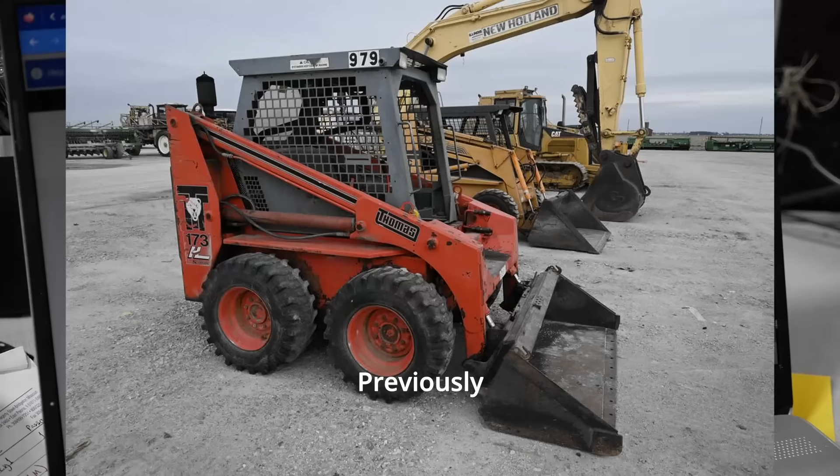It appears to be a Canadian-built copy of an older Bobcat. It won't start. There's your negative battery cable. There's your negative battery terminal. Water pump bypass hose. Nope.

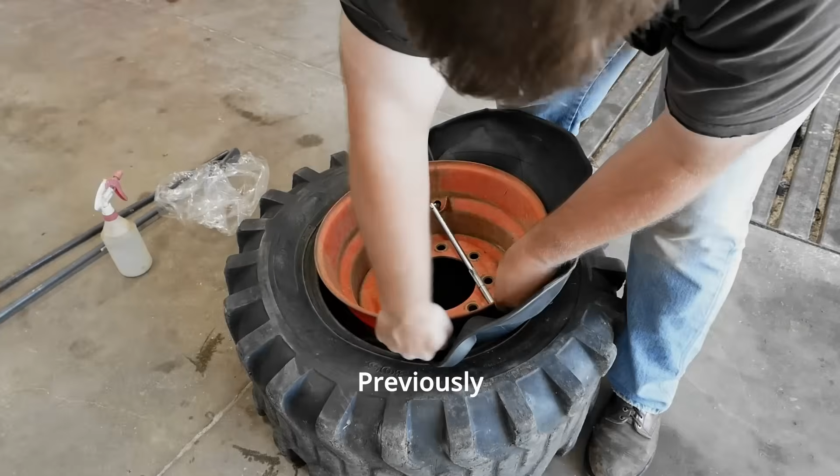Hey little buddy. You got in there, pup.

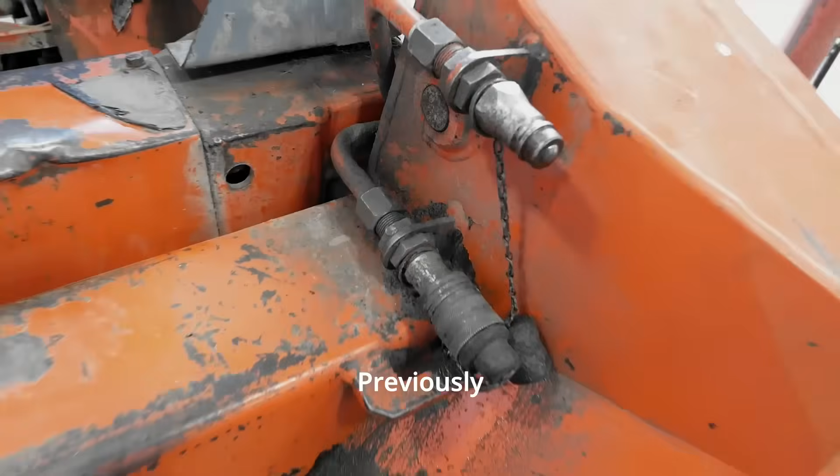You can get out. That's some impressive wear for something with basically no load on it. The auxiliary couplings here leak pretty badly. The left side boom cylinder, it leaks pretty badly. Needs to be rebuilt. But the big problem is the engine. It runs fine, but it just doesn't seem like it revs up high enough.

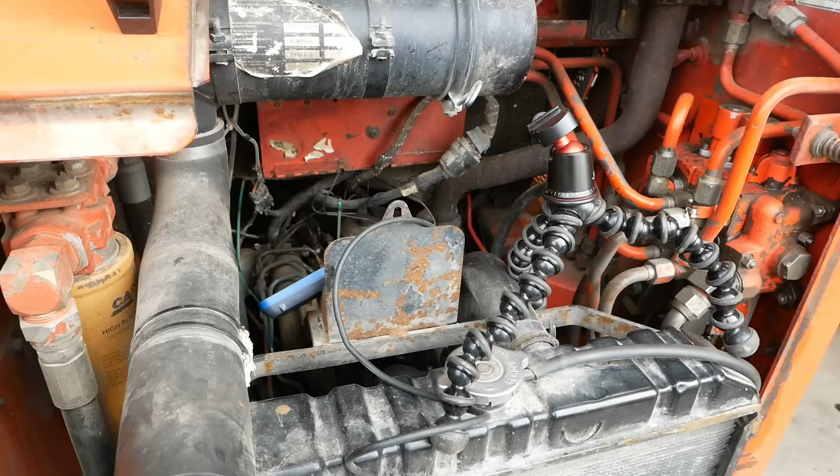Always camera shy. First things first, I'm trying to figure out why the engine won't rev up all the way. I pulled this cover off the side of the injection pump. This is the shutdown lever. I don't know if you guys will be able to see where it lives, right there in front of the dipstick. There are 3 springs. There's a start spring, a torque spring, and 2 governor springs.

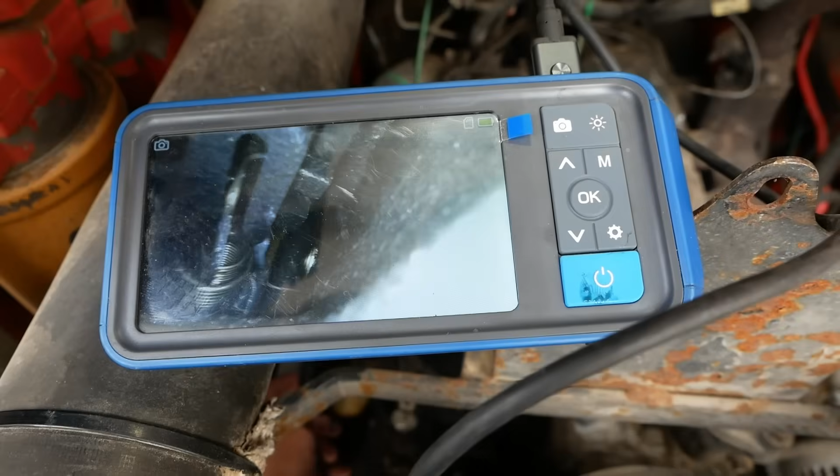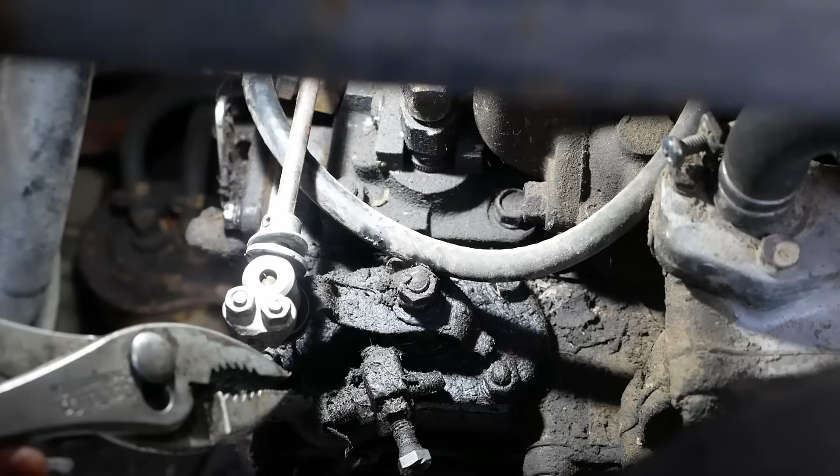You can see the governor springs right there, one inside the other. They both appear to be intact. So I don't think that's the problem. I'm pretty sure the governor springs are okay, but I did stumble onto something interesting. So this is the throttle shaft, or some people call it the governor shaft. And yeah, I can turn that inside the lever, like quite a bit. I can turn it probably 30 degrees. That doesn't seem right. So I don't know if there's a key sheared or something.

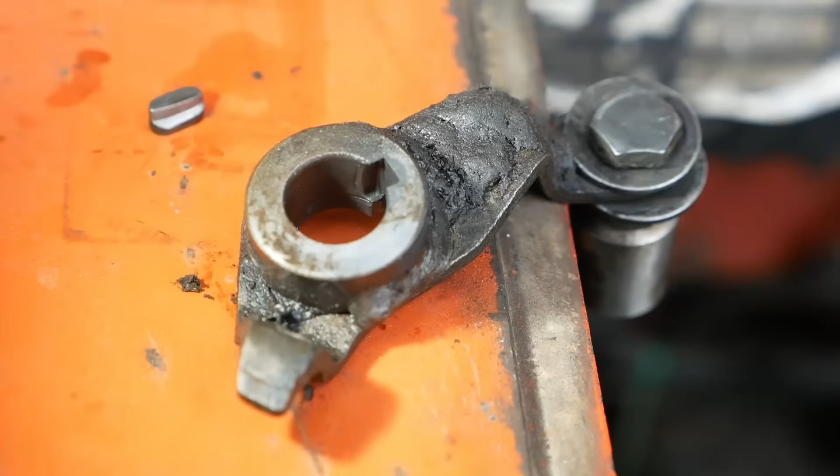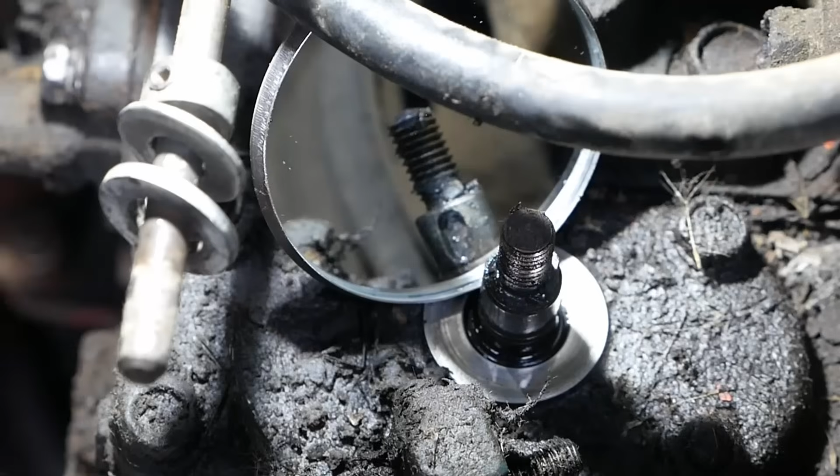I'm gonna pull that apart and we'll see. Well, there's your problem. At least that's a problem. Pretty extreme wear on that keyway. The key itself is also worn down to about half its normal thickness. Luckily, the keyway in the shaft looks okay.

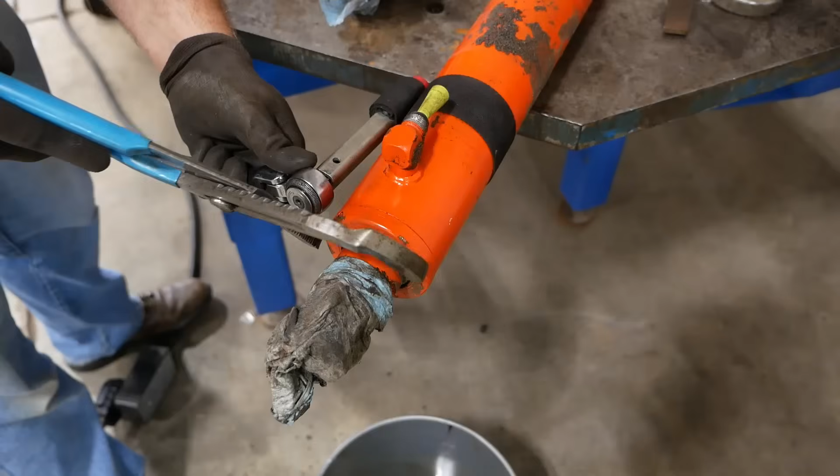I don't see any bite marks. I think this might be her first time. Oh, I don't know if this is gonna work or not.

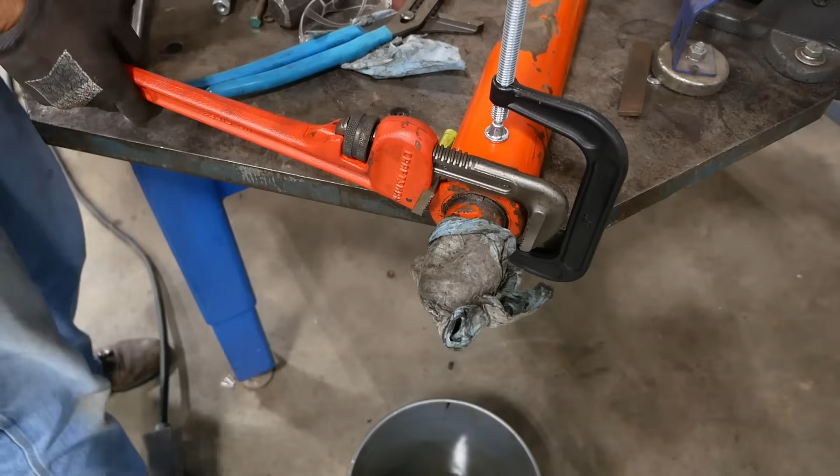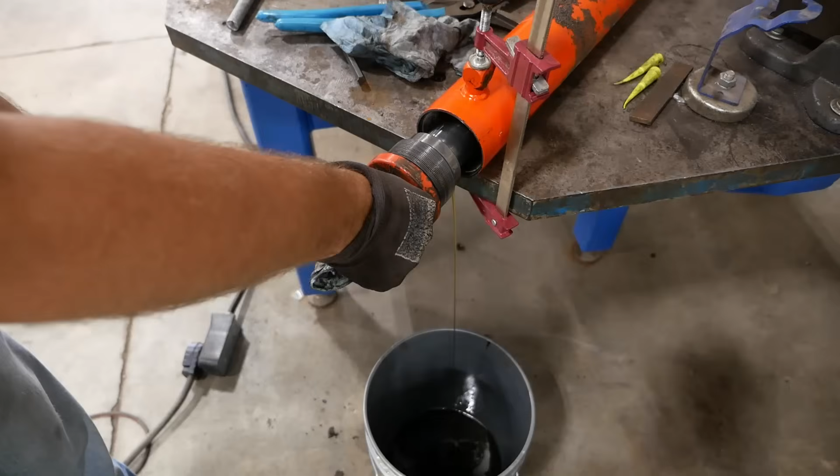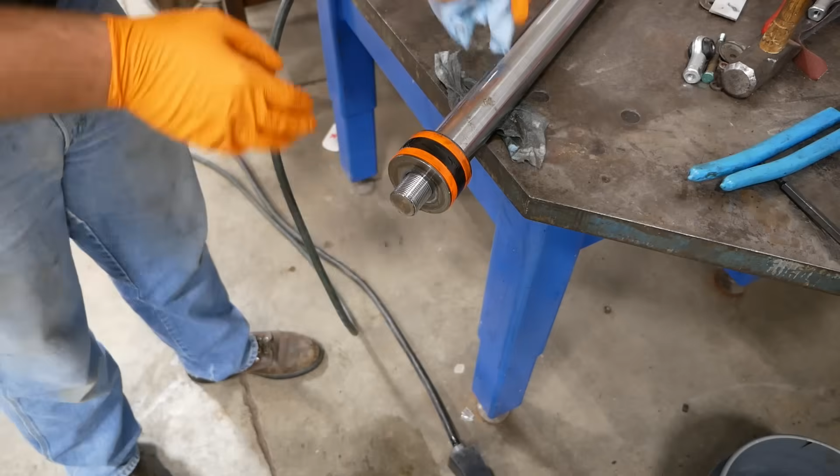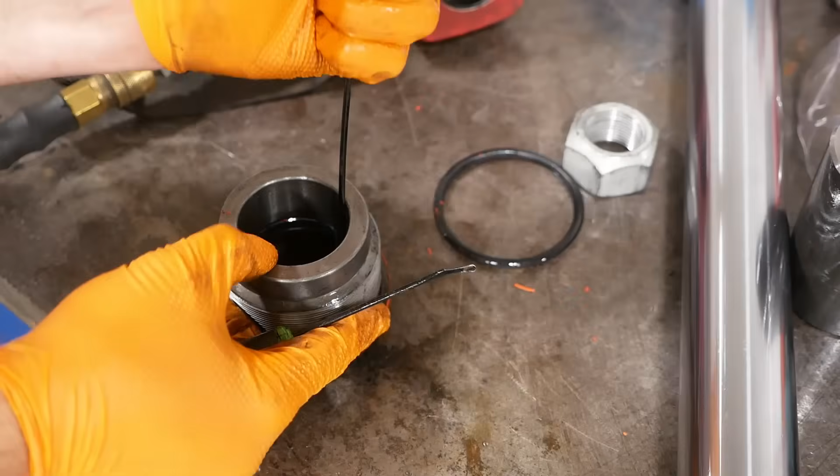Now we're gonna need the pipe wrench. So it has this hole here for a pin spanner, but that's more for assembly in the factory. Usually doesn't cut it when you want to take them apart. Oh gosh. Like I said, it's easy, big baby. Nothing to it. Oh, well, there you go. That makes it easy.

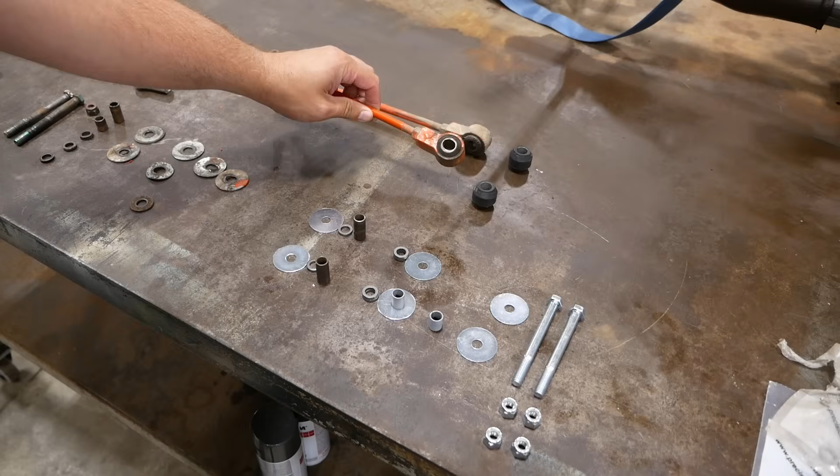I think we have the parts to fix these control linkages. Some of these were not easy to find. This should be the correct stack of washers and spacers. The only part we're going to reuse is these bushings that fit inside the joints. Everything was pretty sloppy. Even the washers were worn out. We had a weird bronze bushing stuffed in there for some reason. That one's not too good, so we're going to start over from scratch.

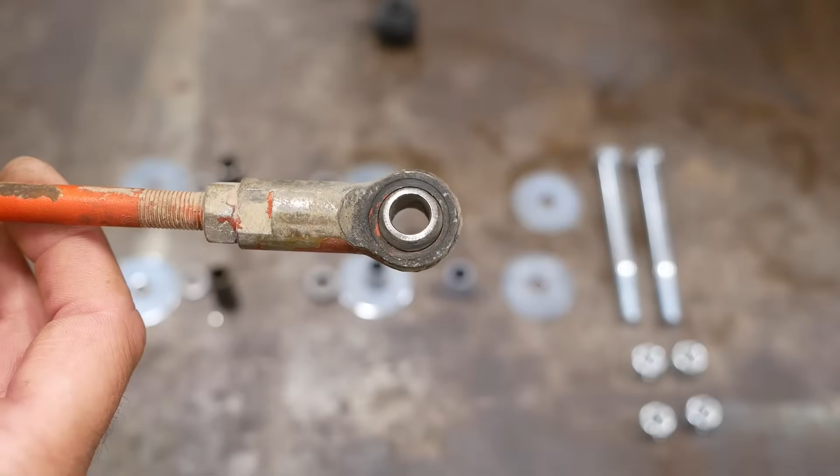The big thing is the rod ends. This end's not too bad. They have a plastic insert. They probably would have been fine, but they're cheap enough. I'm going to go ahead and replace them with a greasable version in case someone ever wants to grease them. The other end is not so good.

That's pretty wonky. This is a custom part, and they've pressed in a rubber bushing, which is made by Lord. I was finally able to track down someone who would sell them to me. This is a pretty standard setup for like aircraft controls. So if you're in a pinch trying to find these parts, an aircraft parts supplier might be able to help you.

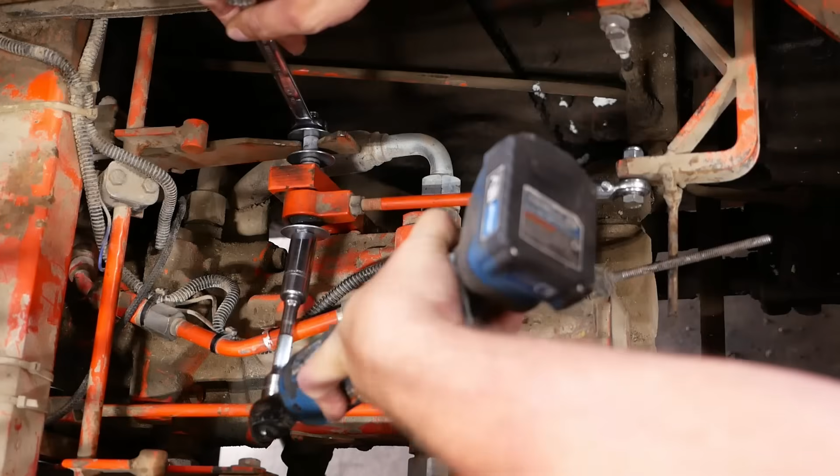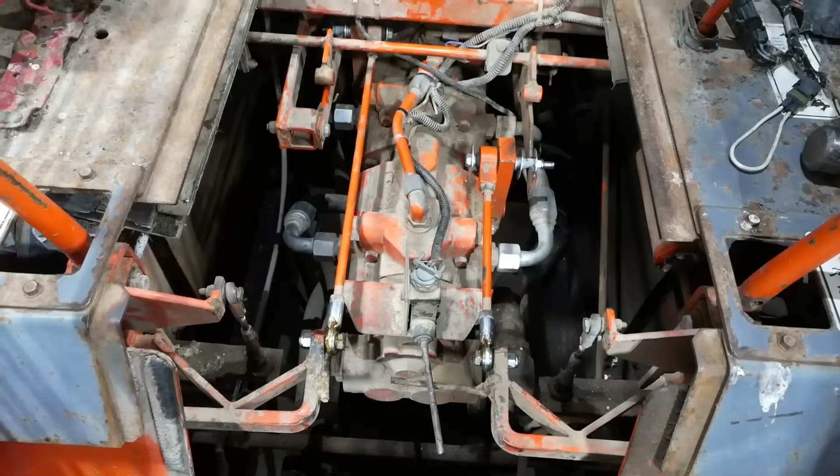That'll work. I'm sure we'll have to make some adjustments, but it's much better than it was. I know it probably seems trivial, but sloppy controls, they're no fun. Also, turns out we have the original battery hold down bracket. It was in the compartment over here. In fact, I picked it up in the video. I just didn't know what it was. So I went ahead and installed it. Yeah, no more block of wood required.

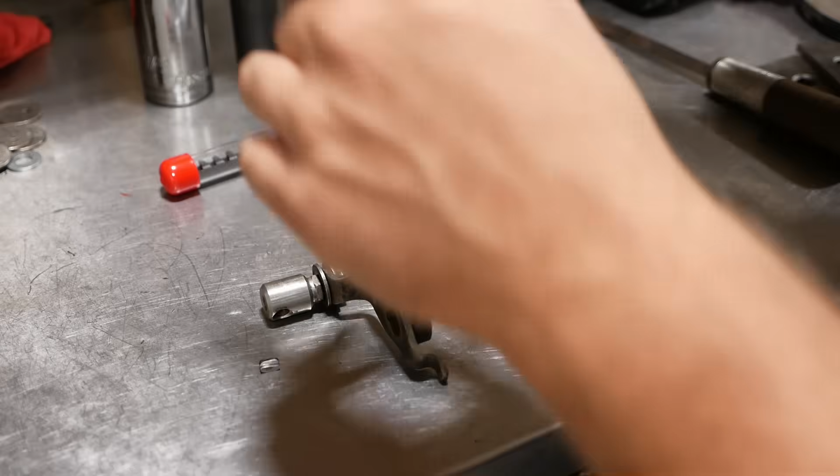I struck out trying to buy this part. Apparently my local dealership is a Kubota equipment dealer, not a Kubota engine dealer. So they can't even look up this part unless it's in a piece of Kubota equipment. Said if I had the part number, they could probably order it, but I don't, so they can't. Apparently the nearest Kubota engine dealership is somewhere over in eastern Wisconsin, so that's not very handy. Doesn't matter. I think we can fix it pretty easily.

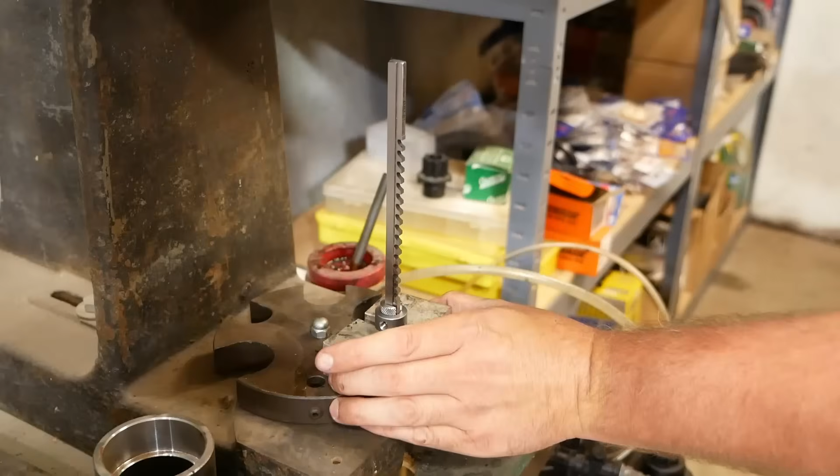So I ordered a shaft collar that has the same outside and inside diameter as this piece here. All we got to do is cut through this weld, remove this bushing, broach a new keyway in this bushing, and weld it back together. I also got a new key. Okay, this should broach a 4mm keyway into this 12mm bore.

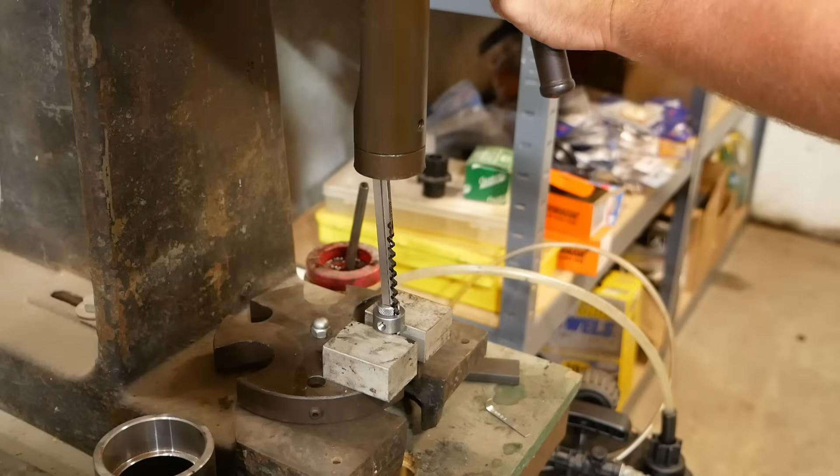Big thing you gotta watch when you're broaching is the broach wants to lean one way or the other, usually forward, which makes it broach too deep if you're not careful. Like I said, wants to lean forward. I mean backward. That's why I started with broaching. Figured I'd screw it up.

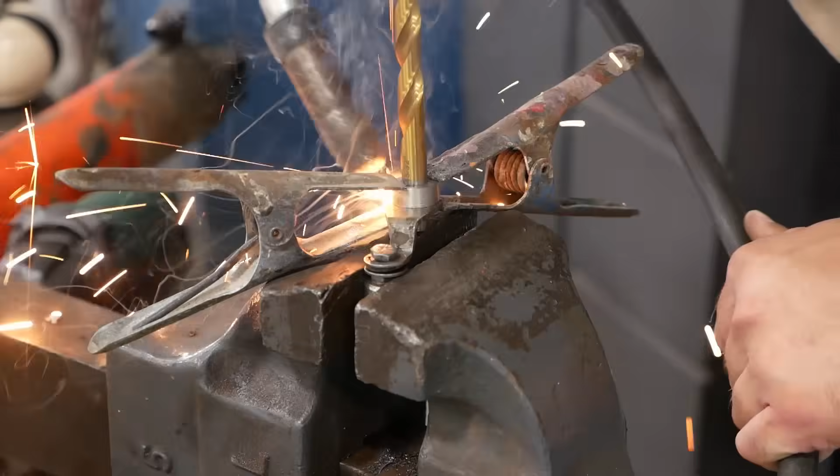That'll do. Little gray paint, nobody would ever know the difference. In case you weren't following what happened with this bushing, it broached too deep. I was in the middle of giving a lecture about how the broach likes to tip, and the broach tipped. The problem is the cutting pressure is all out here at the tips of the teeth, and it makes the broach want to lean back and cut too deep on the bottom.

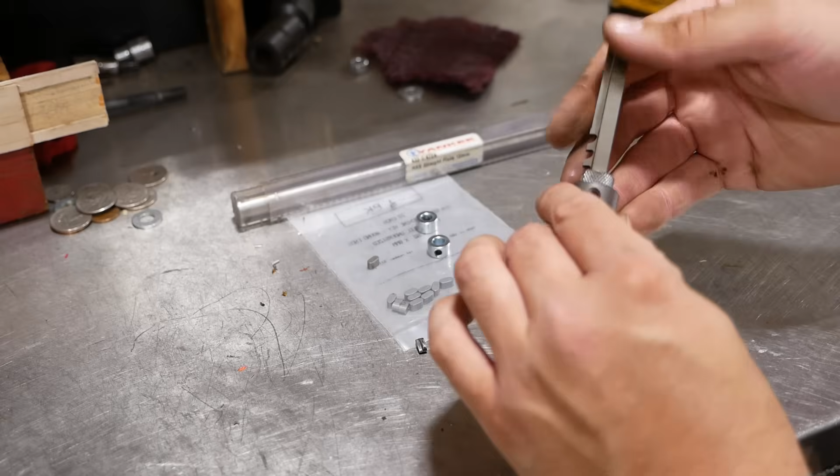See how you had that gap? So it should be like that, and it wants to rock back like that. So I should have turned it 90 degrees so it was better supported. Also, there's always play in the ram of the arbor press, so you gotta take small bites, pay attention, that kind of stuff. No big deal. That's why I have a lathe. This collar was too thick anyway, so I was gonna have to turn it down no matter what. For some reason I had a 12mm reamer, so not a big deal.

Oh, I probably should have put that through the linkage first. Yep, I should have. Okay. Oh, that's pretty sloppy in there too. Probably should have just replaced the whole throttle plate. I guess we'll see if this works first.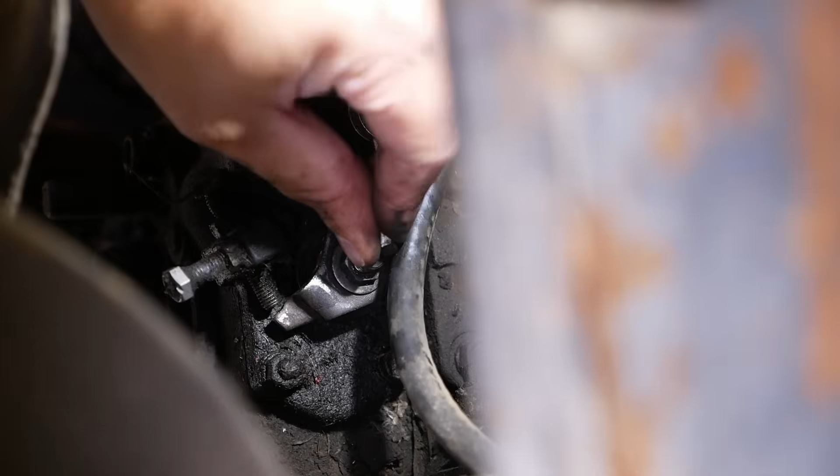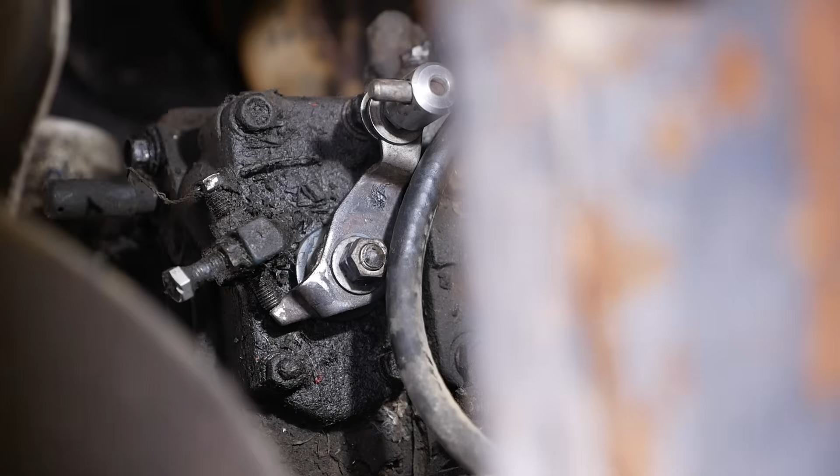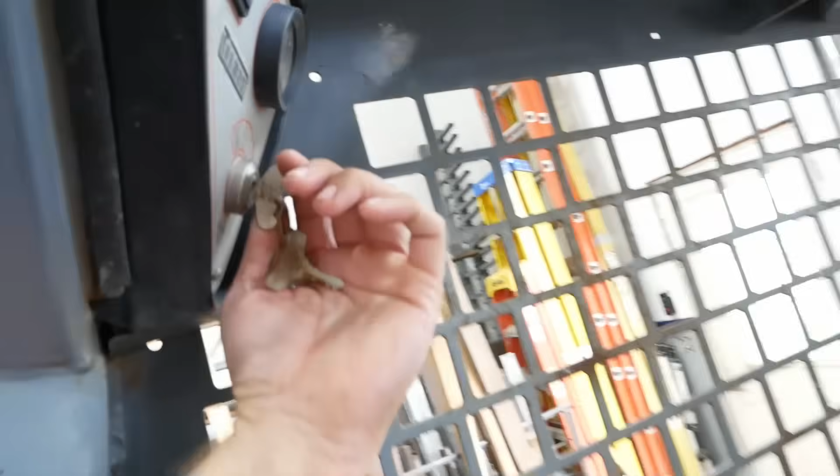Oh, this is pretty hokey. Be a lot better if it tightened down against the shoulder instead of having this weird double nut setup. Yeah, because if you tighten it too tight, it stops turning. I don't know, we'll give it a shot. Shouldn't be a problem to run it with the cylinder off, as long as we don't pull any levers. I'm gonna go ahead and put the bar down. Okay. Here we go.

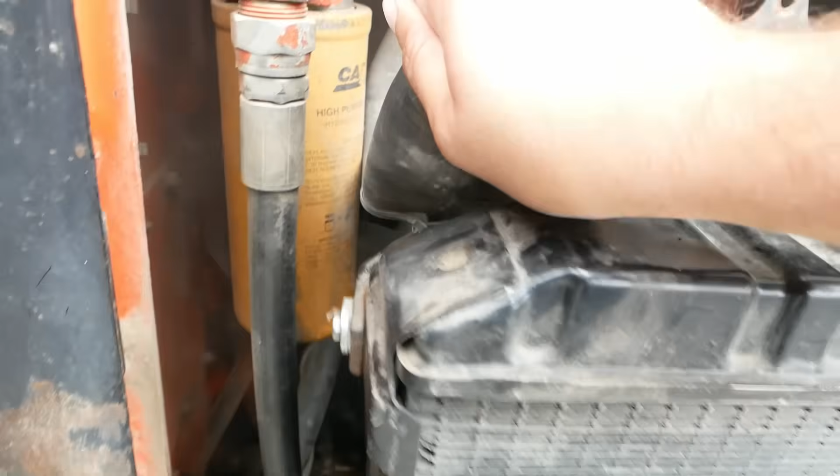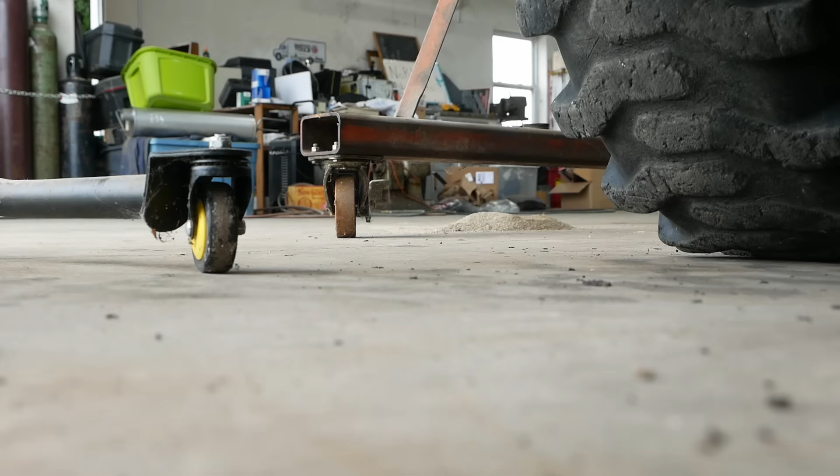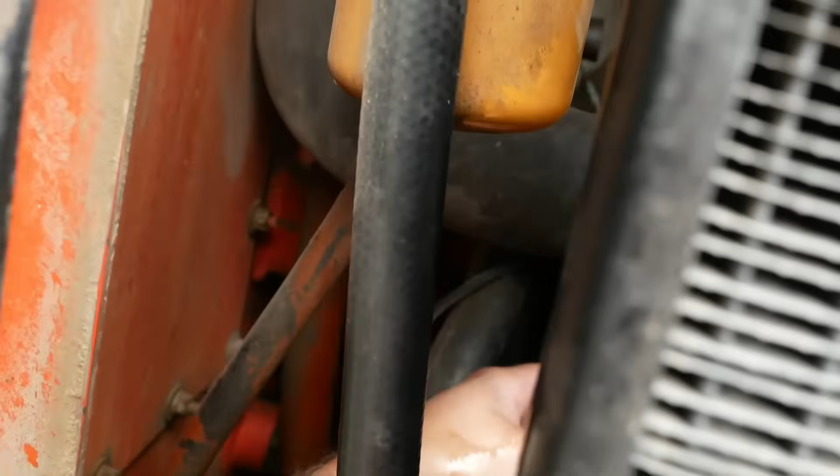That's not good. We're stuck at full fuel, and I can't shut it off. I don't even know how to. Come on, baby, die. Can I pinch the fuel line some way? Oh, thank God. That was not good. What the heck did I do wrong? Was not expecting that. Why doesn't the shutdown work? Okay, well, yeah, that's not good.

Well, that was fun. She was stuck at full throttle and then some for probably about 30 seconds. The shutdown was unresponsive, the throttle was unresponsive. I tried capping off the air intake, that slowed it down, but it didn't kill it. I finally was able to pinch the fuel line and shut her down completely. Yeah, I guess I got the little shutdown lever in the wrong spot when I put it back together. So I fixed that. We're gonna try it again. Hopefully we don't have a repeat, because I don't think she's got too many of those left in her.

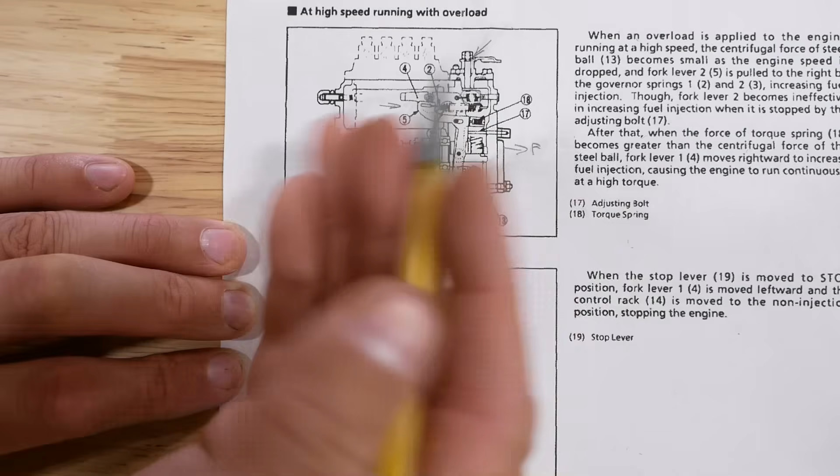Here's what happened. This is the injection pump. This is the front of the engine, which is actually at the back of the machine. This is the throttle shaft that had the worn keyway that we repaired. This is the end of the rack. It connects to the plungers and it controls how much fuel they deliver. When the engine is turned off, this cold start spring pulls the rack all the way to full fuel. It basically puts it at full throttle, makes it a little easier to start. Once it starts, the governor pushes this lever out, pulls the rack back to the normal position, and you go back to your normal RPM.

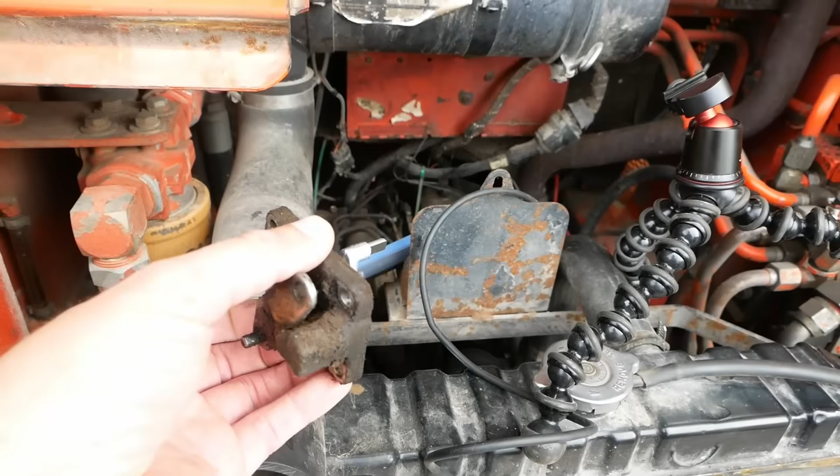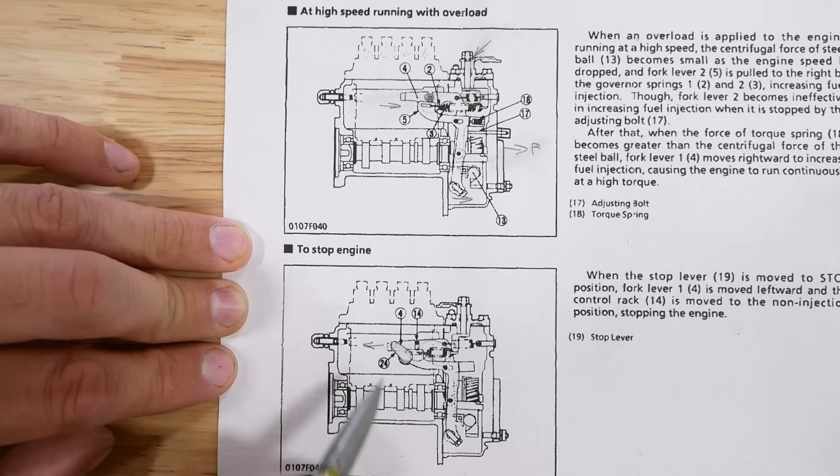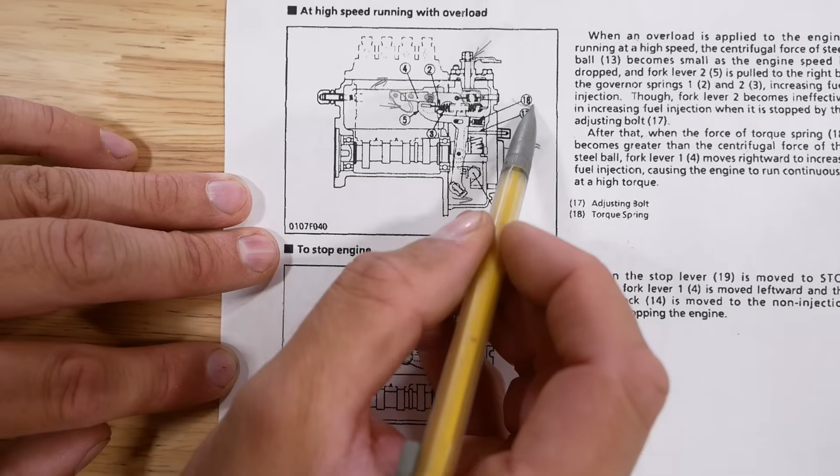When you shut the engine off, this lever here, which is inside the cover that I removed to inspect the governor springs, pushes the rack all the way towards the no fuel position, shuts the engine down. What happened is when I installed that cover back on the pump, I got the lever over here instead of over here. This lever is actually spring loaded this direction, so it was spring loading the rack into the full fuel position. So basically sticking it at full throttle and then some, because it was actually pushing against this torque spring. That's why it was smoking like a freight train.

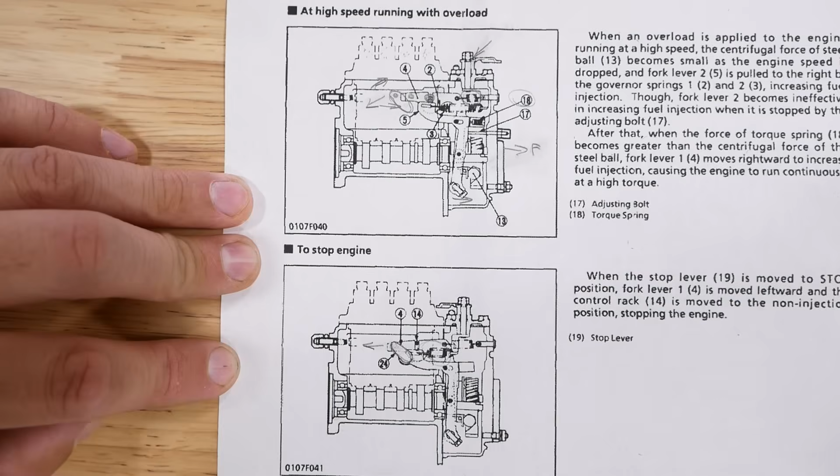And even worse, because the lever was on the wrong side, I couldn't shut it down. There was no way to pull the rack off of the full throttle position. So yeah, that's not a good situation. I don't know how I did that. I mean, I thought I was being careful to get that in the right spot, but apparently not. So yeah, if you're working on a Kubota, be careful of that.

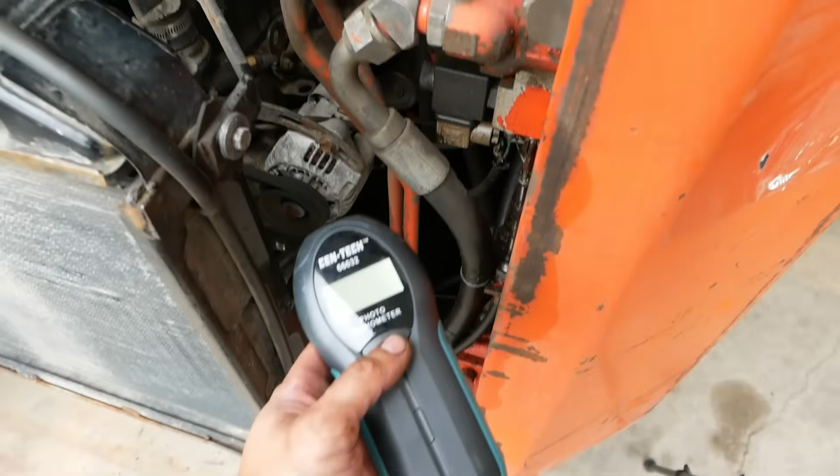That'll do. 2700 is good enough for me. Good thing these Kubota engines are tough. I don't think we hurt it. Probably wouldn't have wanted to run it at full rack for much longer. I was waiting for pieces to come flying out. I'm taking a break. That was a heart racing moment.

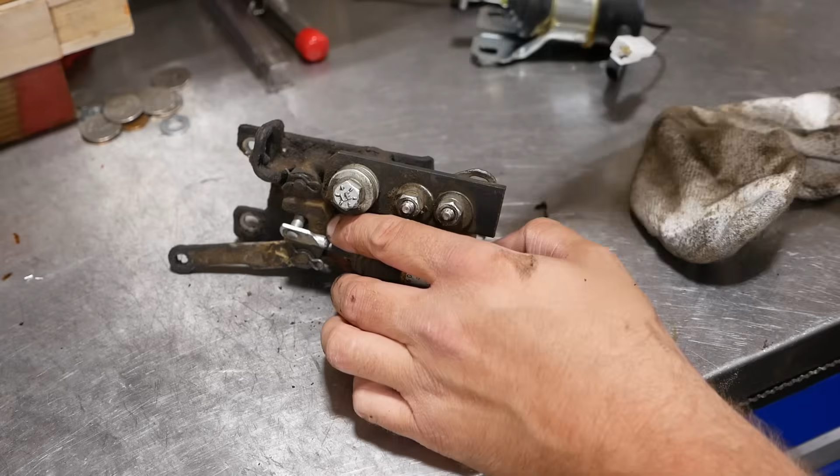They've got this shutdown solenoid all janked up. This is the wrong solenoid. They cobbled together a couple of brackets with a bunch of washers, jammed an inch-size bolt through it. It works, but doesn't really line up correctly. Anyway, they had the right one at the local dealership, so I went ahead and bought it. Kind of pricey, but should work better than this, whatever you want to call it.

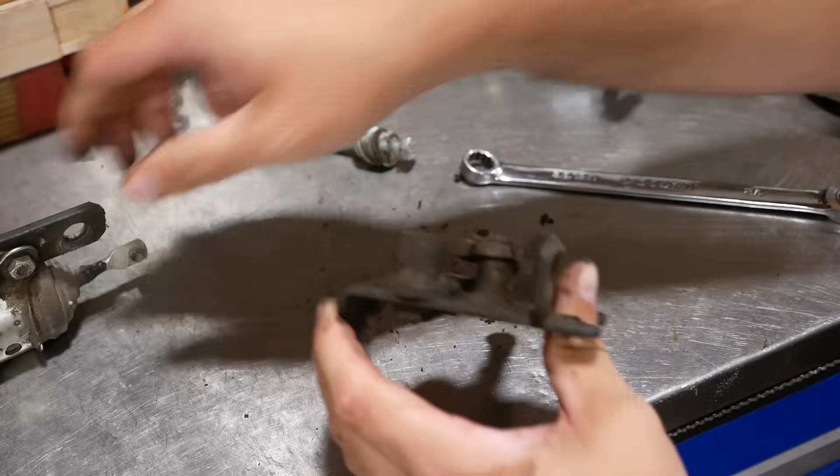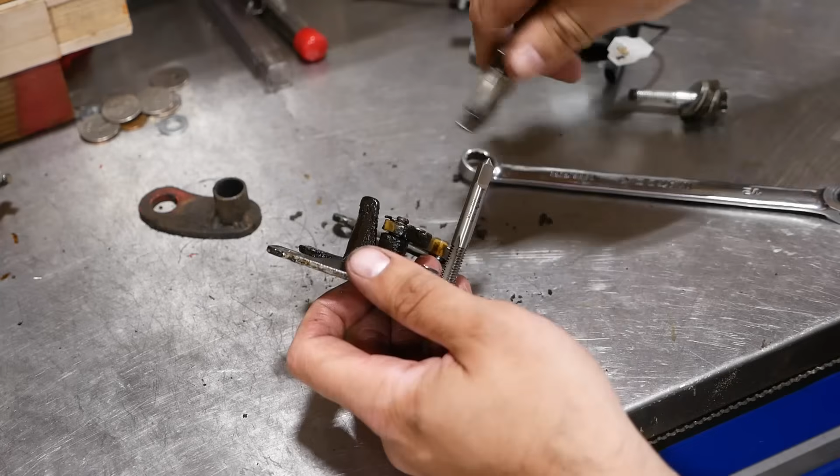See how bad they screwed the threads up. It's always amazing to me that people just, they don't seem to even contemplate that there's a metric system. Yeah, sure enough, they just jammed an inch-size bolt through there. I'm gonna clean that up. Well, that's a tiny bit better. The old Kubota is a bit of a leaker. Okay, we converted that from 5/16 back to M8.

That'll work. Looks good. I think we're done back here. I know it's just my lack of experience, but it seems like every time I rebuild a cylinder, I run into a seal design that I've never seen before, and no exception here. Everything is super simple, except for this piston seal.

These orange cups are actually wear bands, and this thing in the middle is the seal. It's a lamination of fabric and rubber, I guess. Anyway, it's made by Hallite, but good luck getting them to sell you one. I called the company, they referred me to a distributor. The distributor said I would have to order 7 pieces minimum. They would have to ship from the UK, but it doesn't matter because he didn't think they had them in

stock anyway. However, he was able to cross it over to something else, and this is it right here. So this thing replaces that thing. And I bought this from Hercules Sealing Products out of Florida. Anyway, I think I've got everything we need. Let's start putting it back together.

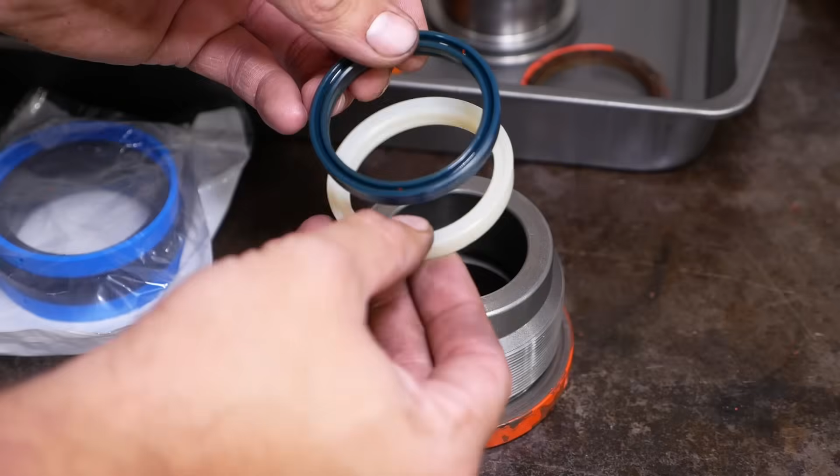We'll start with the gland. It has a U-cup seal. This is also made by Hallite, but these are pretty generic, so I just bought one that had the same dimensions. This is a rod side seal, so the inside leg is just a little bit shorter than the outside leg. It's supposed to cheat the pressure towards, I don't know, one side or the other. Anyway.

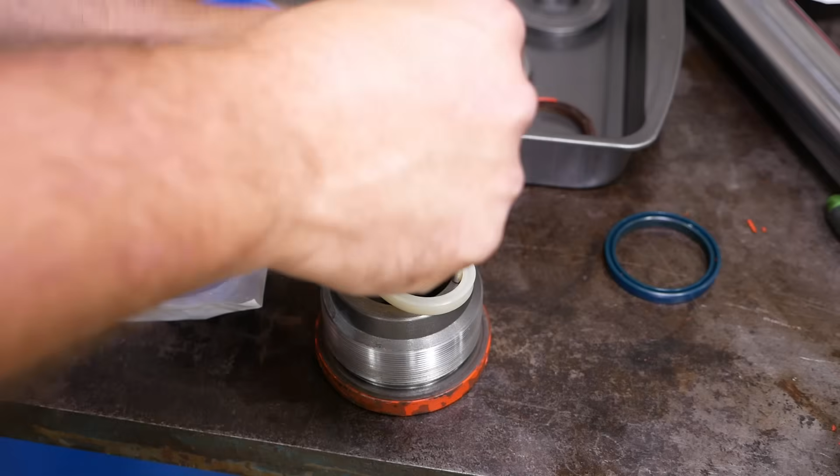Actually, you know what? I bought a tool for this. There it is. Forgot I had it. So I think I can, no, it must be the other way. Yeah, fold the seal back onto itself. Maybe. All right, there's a learning curve. Come on, the tool's supposed to make it easier. All right, here we go. So the cup faces towards the pressure. Ha! Pretty slick.

Now we need an O-ring, which I had to buy a pack of 10. Looks the same. And a wiper. So this doesn't actually seal, it just scrapes the bigger chunks off the rod before you suck them into the seal. Okay, that's done.

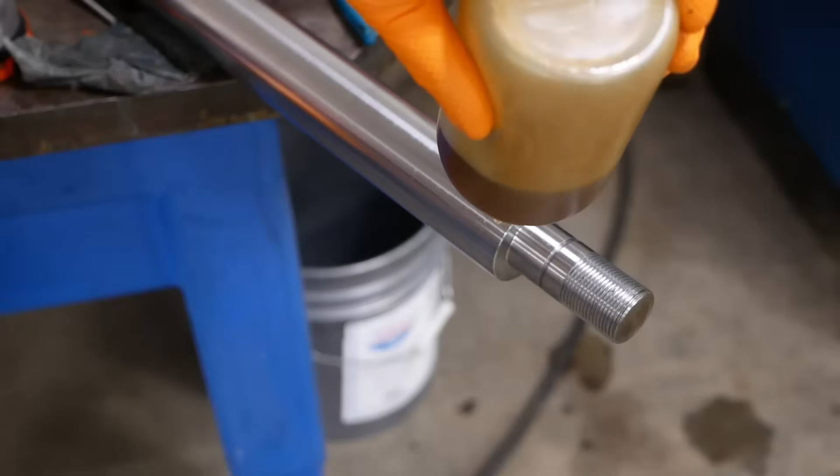Now the piston, this should be super simple. Drop our new seal on, like so. And we need an O-ring for the inside. I had to buy 50 of those. It's okay, I'm sure we'll use them for something else. There it is. And the spacer. This is just here to limit the stroke of the cylinder.

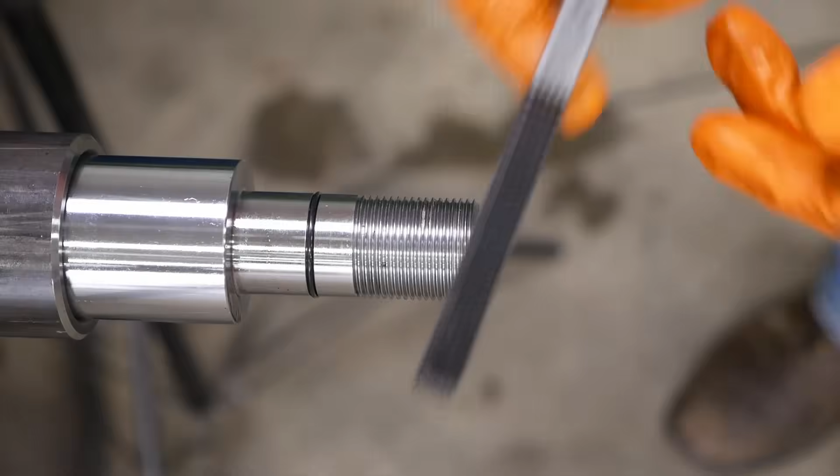Got a little hickey on the threads there. I want to clean that up. This is a thread file. A lot of people asked about that in a previous video. It's just a file that's made to the same pitch as the thread. So theoretically it shouldn't cut any metal that isn't deformed, if that makes sense.

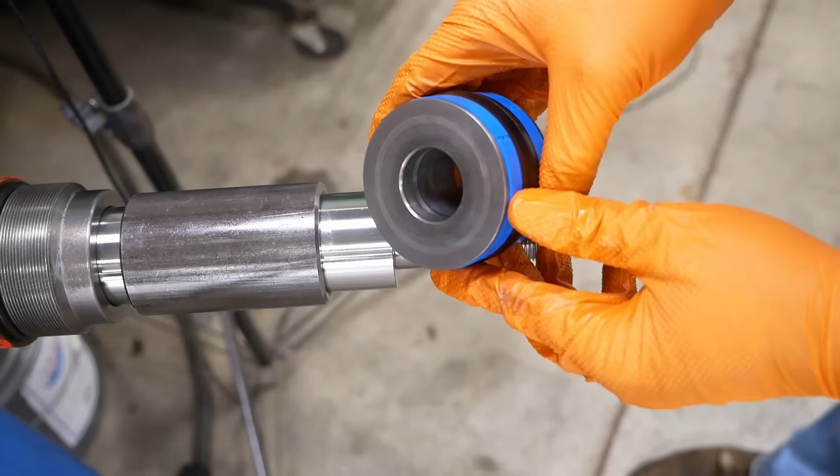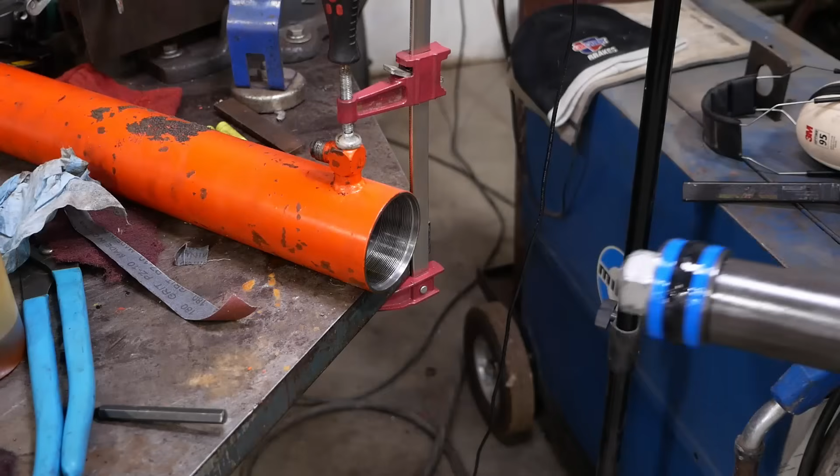Not quite sure why this piston has this little groove machined into it. Seems kind of odd. Sure, it's there for a reason. Just don't know what that reason is. Click. Lot different than the old seal, that's for sure. There we go. Good enough. We'll tighten it the rest of the way when we get it on the machine.

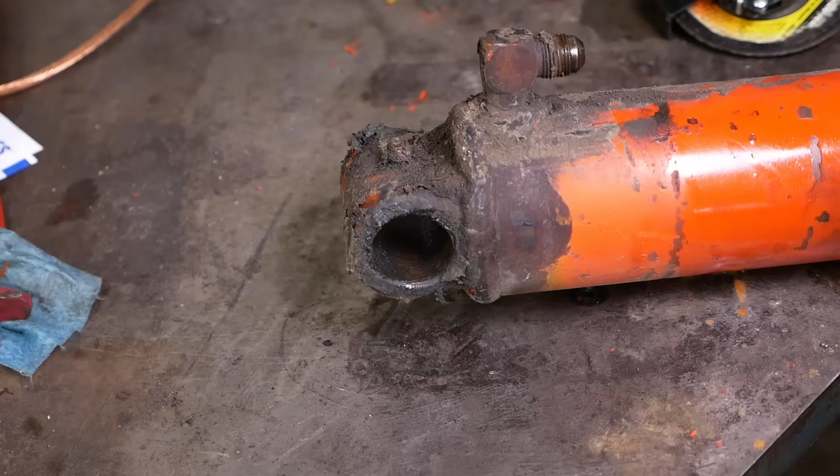There is one other slight issue. Yes, the pin bores are completely slapped out. No, I'm not going to do anything about it.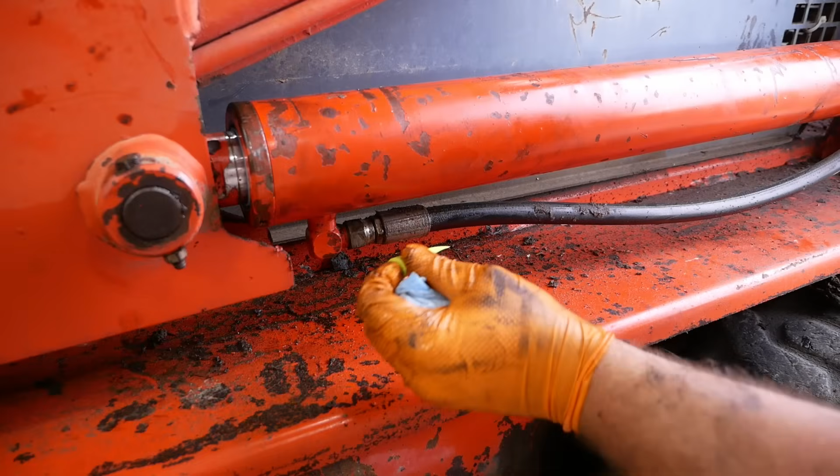These things are pretty handy. I'll try to put a link in the description. They're silicone plugs. I believe they're actually made for powder coating. Like if you have a hole or a threaded hole that you don't want to get powder coated, you jam these in there. But they work really well for sealing up hoses.

Nothing. Wah, wah, wah, wah.

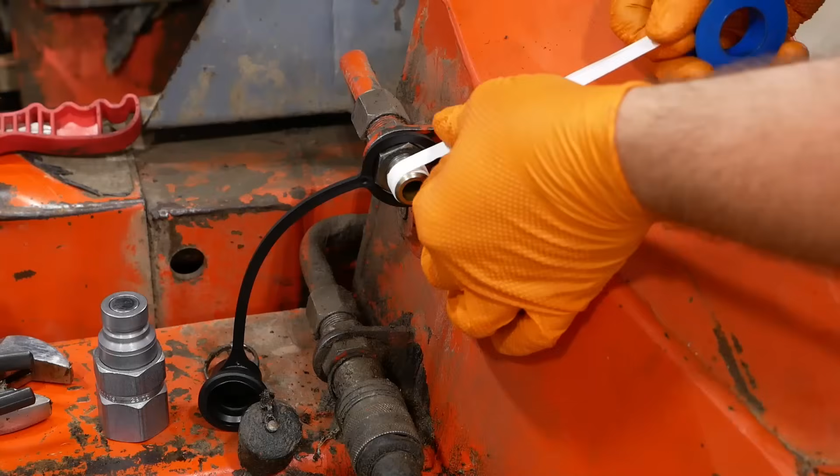These are, I think, Pioneer connectors. That's non-standard, plus they leak. This flat face connector is supposed to be the standard. That way I can borrow everybody's attachments. This gizmo is called a form-a-funnel, by the way. Very handy tool.

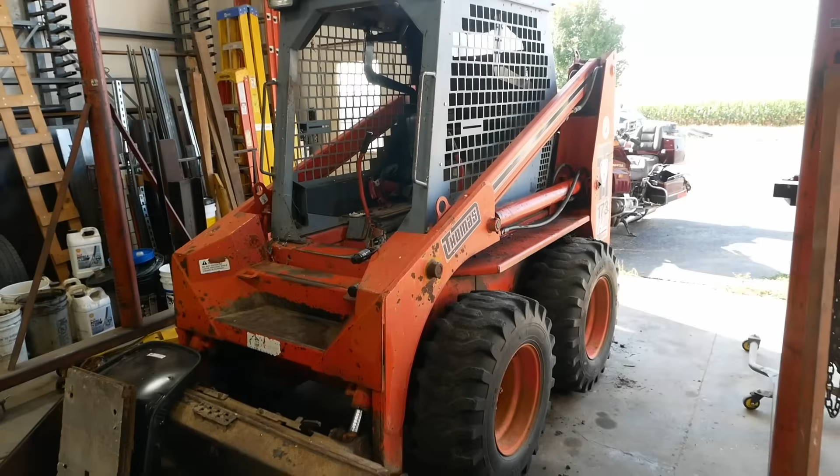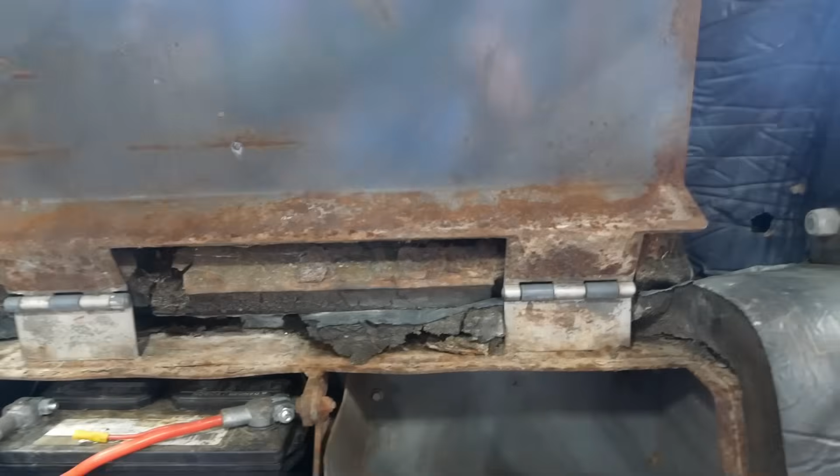There we go. I think we're at a good stopping point. The engine revs up, the cylinder is rebuilt, the linkages are rebuilt, the couplers were replaced. I did also plug the holes in the bottom of the battery box. It probably won't keep them out, but at least it makes me feel a little better.

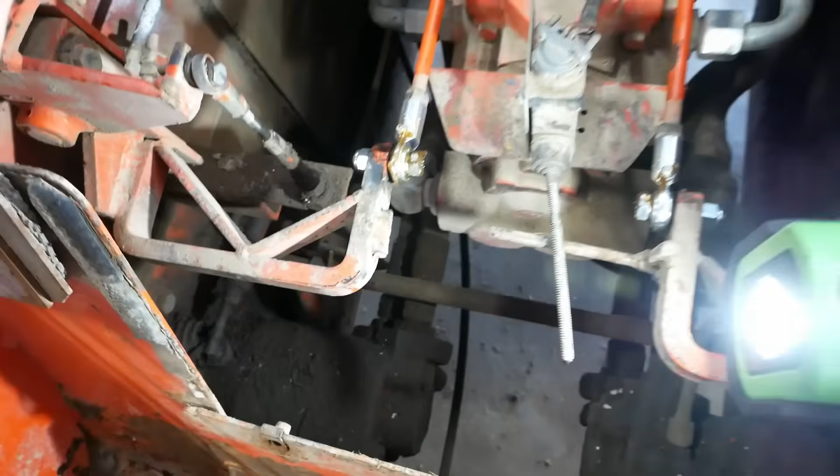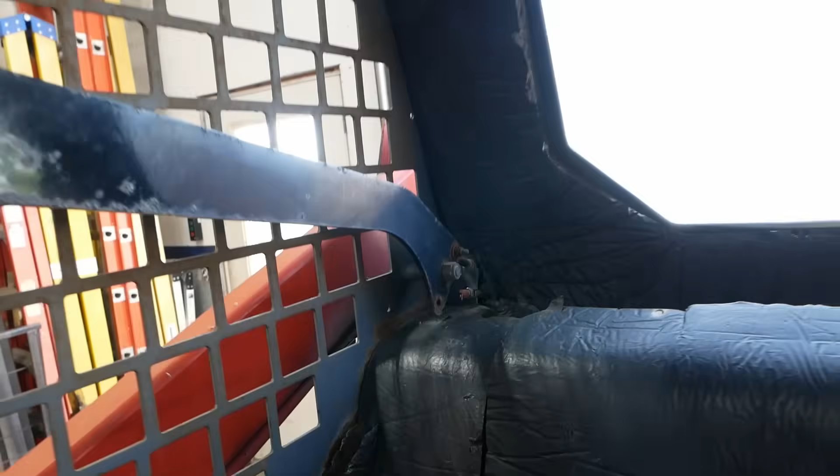There is a brake, like a parking brake setup down here. That big spring there and the crossbar. There's a cable that runs up to the safety bar. See, that cable is broken. When you raise the safety bar, it's supposed to engage the parking brake. It probably works, but I don't see any reason to revive that, at least not at this time. We may have to replace these control cables for the hydraulics though. Sometimes they're a little sticky.

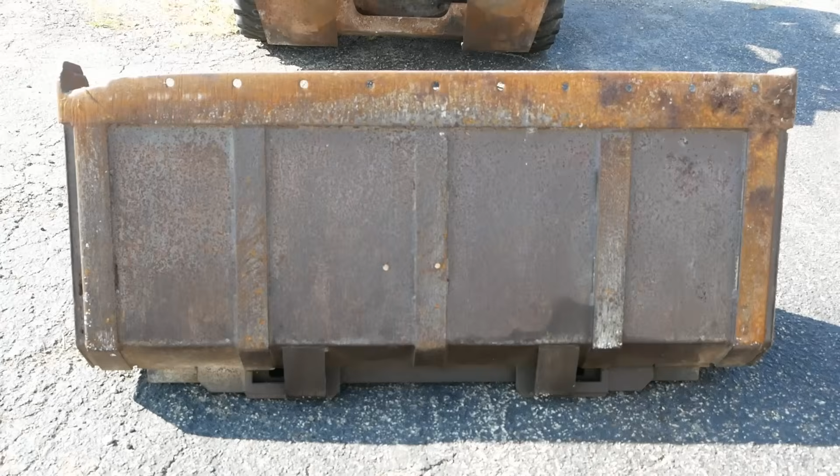We're making progress. It's so much better than it was before, but we still have a lot of work to do. The bucket is really in sad shape. It's twisted, the bottom is bowed, it's worn through the bottom and both sides. It needs a total rebuild or maybe a total replacement.

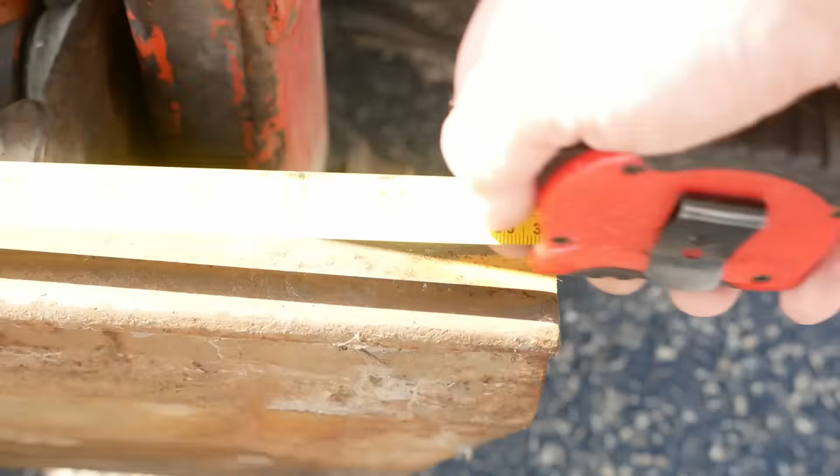But the bigger problem is the quick attach. It is not a universal quick attach. I thought it was, but the dimensions are wrong. It's too wide. And that's kind of a problem because all of the attachments made in the last 25 years are the Bobcat universal quick attach. And if you don't have that, you can't use them. And that's kind of the whole point of having a quick attach. So I'm not sure what we're going to do about that.

Also, I want to change the rest of the fluids. I did change the engine oil, but I want to do the hydraulic oil and the gearboxes and all the filters. And we've got to do something about the rear visibility. You can't see anything behind you. So we need a mirror or a rear view camera or something like that. But we'll tackle that in part 3.